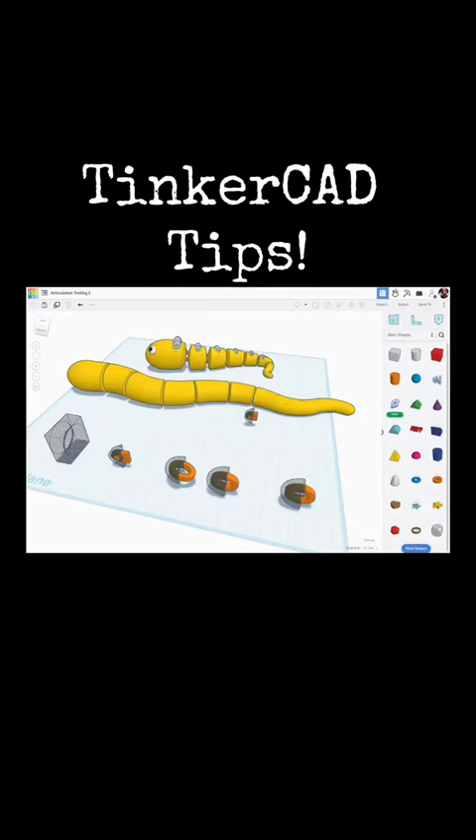TinkerCAD tips, object articulation. This is part 2.

In my prior tutorial, I had been working on this object here, and I showed you this object down here that I used to split this snake I made with wave duplication into separate elements and put a bit of a curve. You can see those cuts I've put into it here. I was using this particular design for a hinge and a pin to join the sections together.

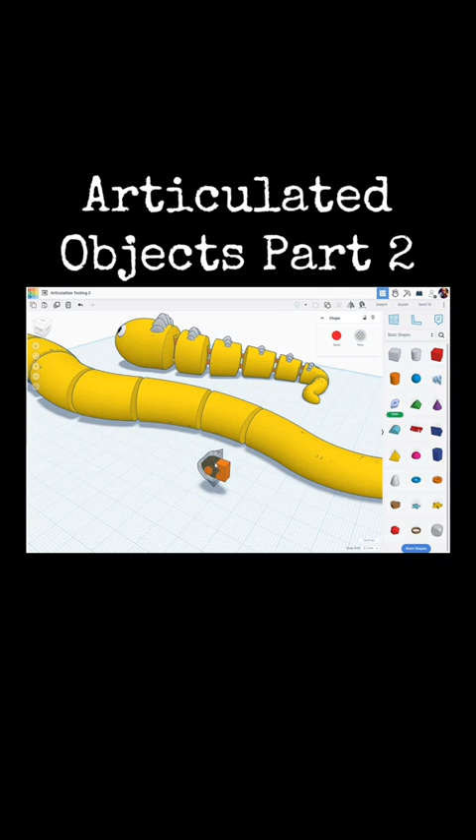Now this particular one I'm going to put into this gap right here. In so doing, I had scaled this down a little bit, and I noted that when you scale these down enough, you're going to want to make sure you select all of those elements and widen it up a little bit.

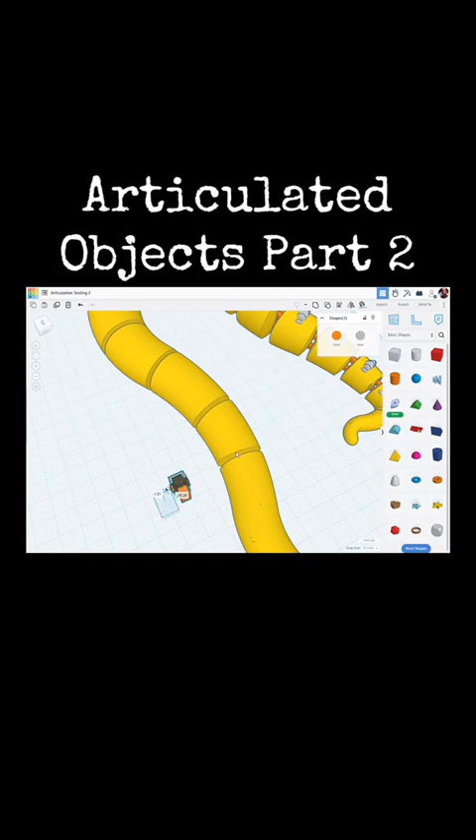So let's continue putting this one into this gap here. Let's look here, it's rotated back a little bit. All right, let's drag it over into this gap. Let's grab the rotation handle and move it about a little bit so it kind of lines up across that gap. We'll move it here.

Now note that I have my snap grids set here on point 1. Let's move it to off. That'll allow the most granular control of the movement here.

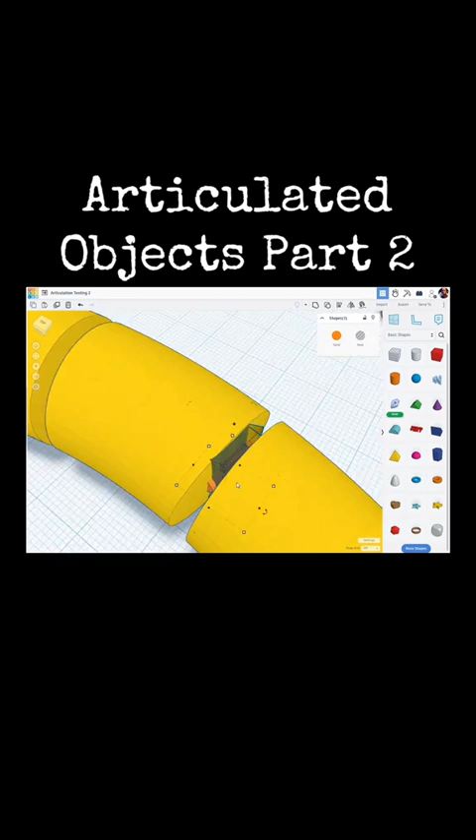And I want to move this such that the whole box is just protruding from the front part. And then this orange pin that you see here is all the way embedded into the back part. So we'll continue moving it here. About there. I can see a little bit on the other side. Let's move it. There we go.

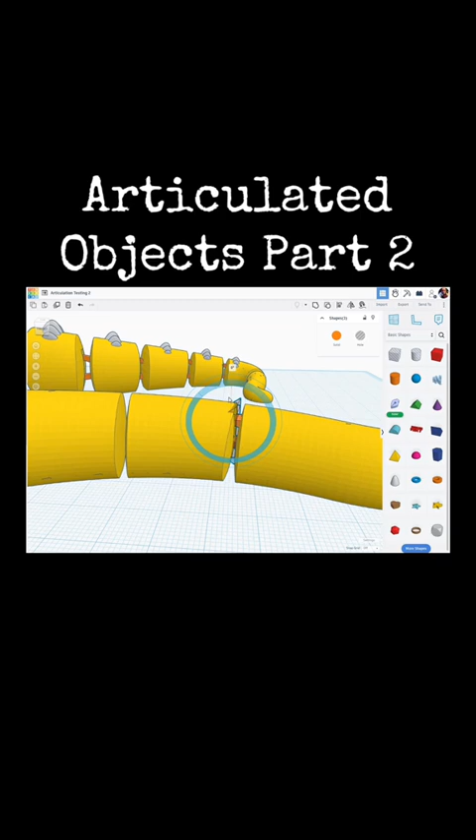Let's go ahead and move all of this down a wee bit. There we go. And when you're satisfied it's lined up where it needs to be...

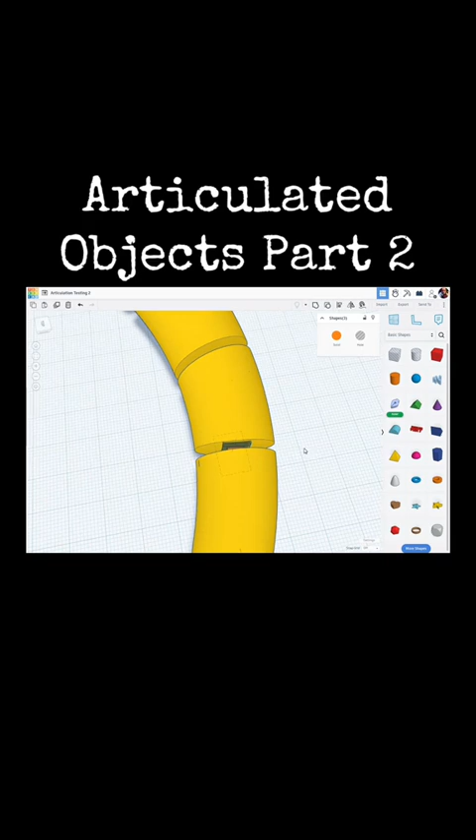What we want to do is grab just this whole box. Oh, looks like we need to move that in a bit more. We'll select all of that. Shift-D, select the snake part of it. Let's zoom in here so we can see everything we're working on. Let's move it ahead. There we go.

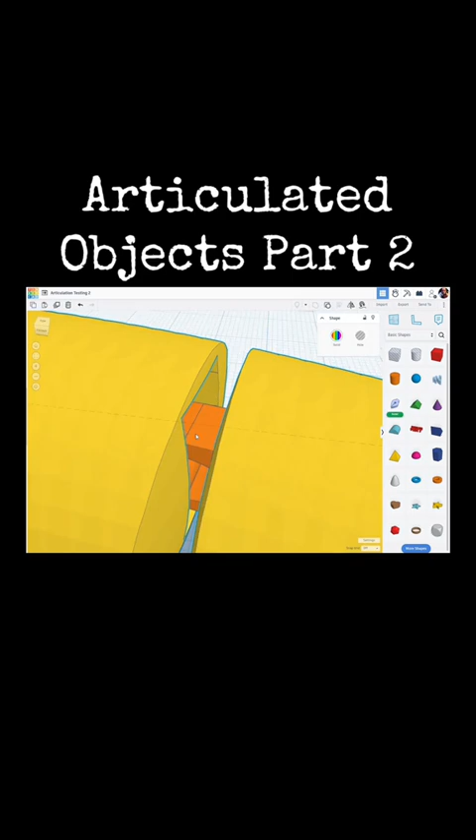Zoom out. We'll grab just that whole box part, shift-select the snake and hit Group. We'll give that a moment to resolve. Once it's resolved, it'll look like that. You can see that hole in that front part now.

We zoom out. If we hit the letter T, we'll make it transparent. You can see that, but the pin and the loop are still separate objects. We have yet to group those. Let's make that snake back to solid, non-transparent.

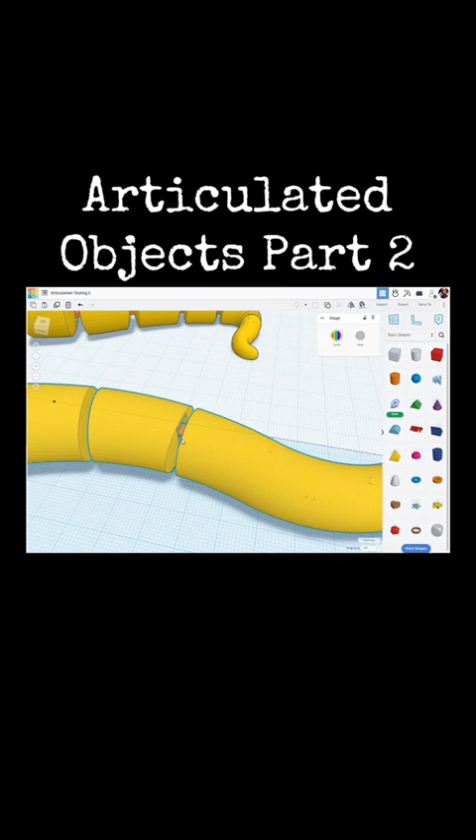I'm going to lasso select all 3 of those parts, verifying there's just the 3 here. Now I can click up here to group, or hit Control-G, and we'll wait for that to resolve. Once resolved, it'll look like that.

Let's back out, hit the letter T, make it transparent. It's kind of difficult to see with all the lines, but there we have the loop, and we have the pin, and we have the hole part of it.

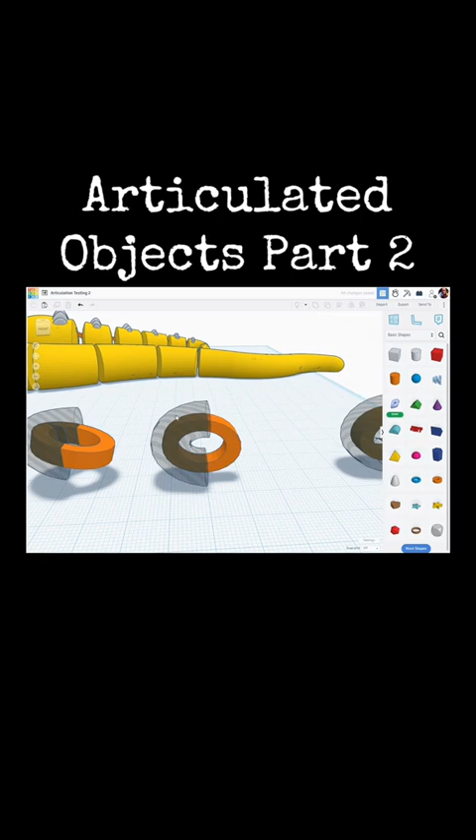So that's that particular design, and I had also been working on an additional design, and I'm going to test both of these on here. This one's made a little bit differently. This is done with these square shapes here, this particular type of object, and I did some resizing and stretching, so we have this loop, and then I made this type of hole object.

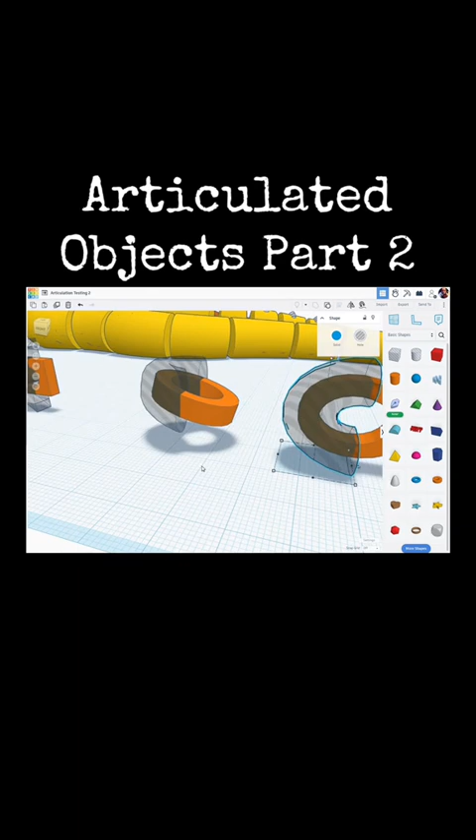It's just a tube, so this is a 2-part hinge. This hole part will be embedded in the front section, and then the loop will be embedded in the back. Now I have one that I've oriented in the vertical, up and down like this, and then I have another one that's done in the horizontal here, like this.

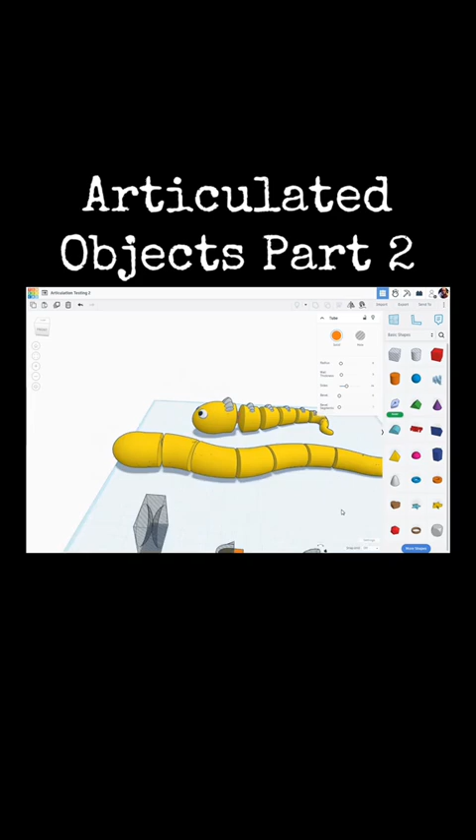I've angled it down a little bit to help with the printing so it's not completely flat and won't need as much support underneath, but both of these should work equally well. So we have a gap up here. Let's take this one and embed this vertical piece into that part of it.

We'll select the two, Control D to duplicate, and bring that over here. Let's move in a bit and make sure this is sized correctly.

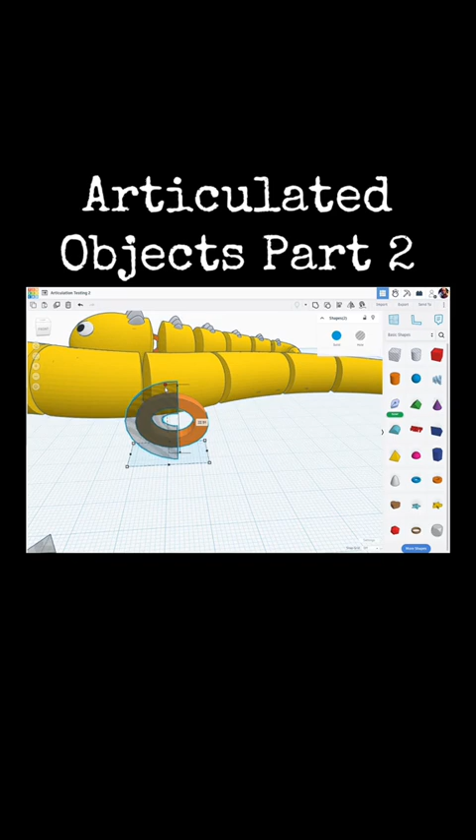I'm going to size it down a little bit, holding Alt and Shift so everything gets resized equally. Okay, that's about the right size.

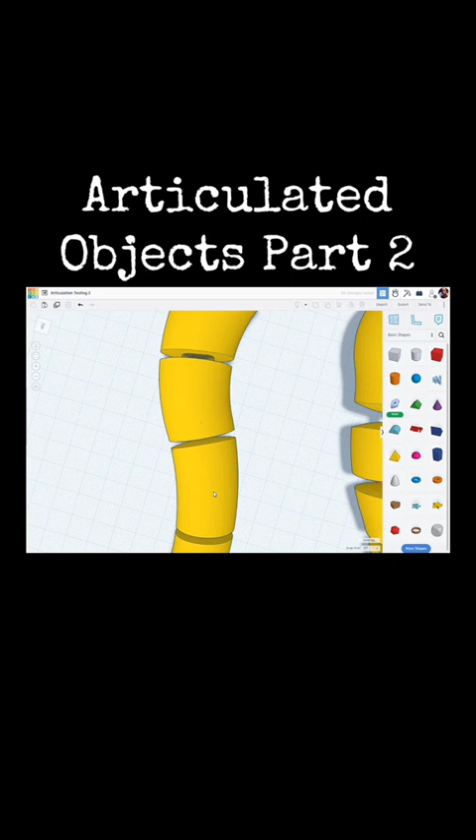While they're both still selected, we'll bring it over. Let's grab the rotation handle and rotate it a bit. To help our cause here, let's select the snake and make it transparent so we can see what we're doing with those inner parts.

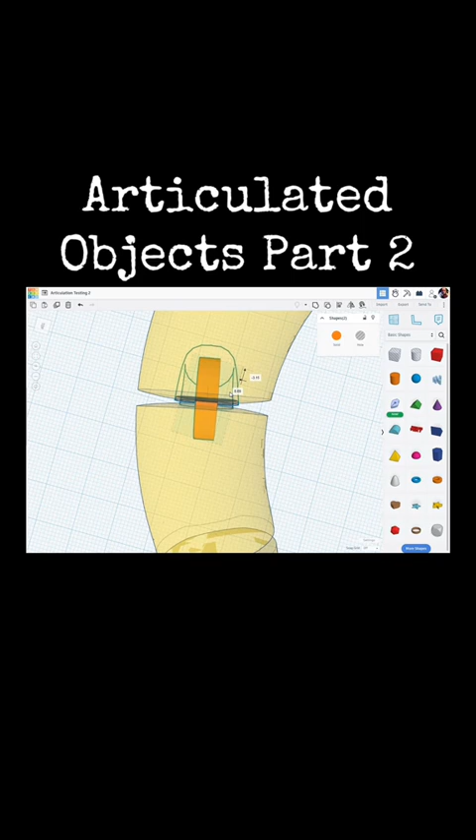We'll position it right above. The orientation looks good, but now we need to move it forward such that the hole part of it is protruding by the front half.

Let's select the snake and make it solid again. Moving in here visually, we can see that part needs to be moved forward a bit more.

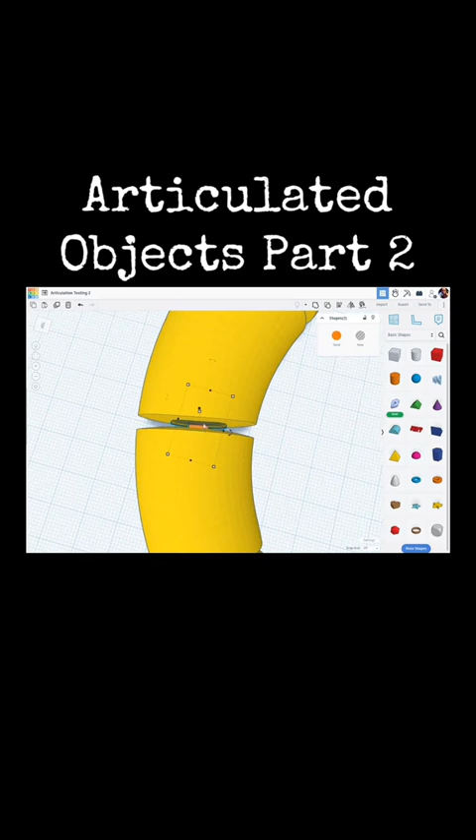So we'll select everything, deselect the snake part of it, zoom in, and just inch that ahead a little bit more. There we go. Let's check from the side.

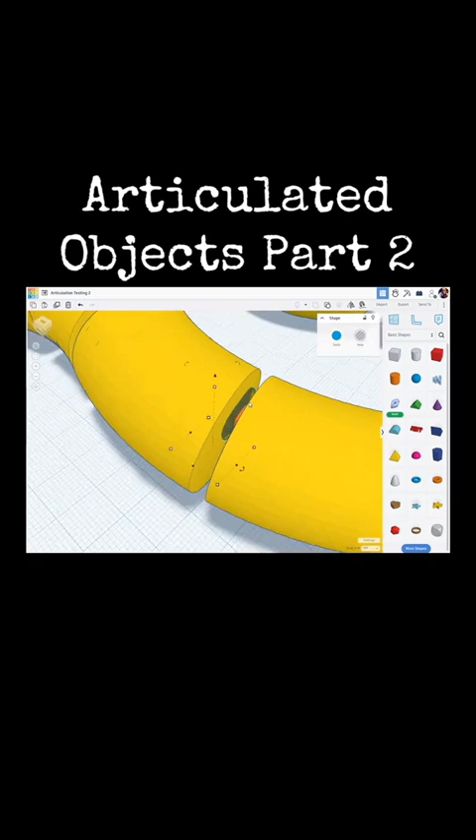All right, once we have it placed, let's zoom in. I'm going to select just that whole tube, shift select the snake part of it, verify I have just the two items, and group that together with Control G or this button up here.

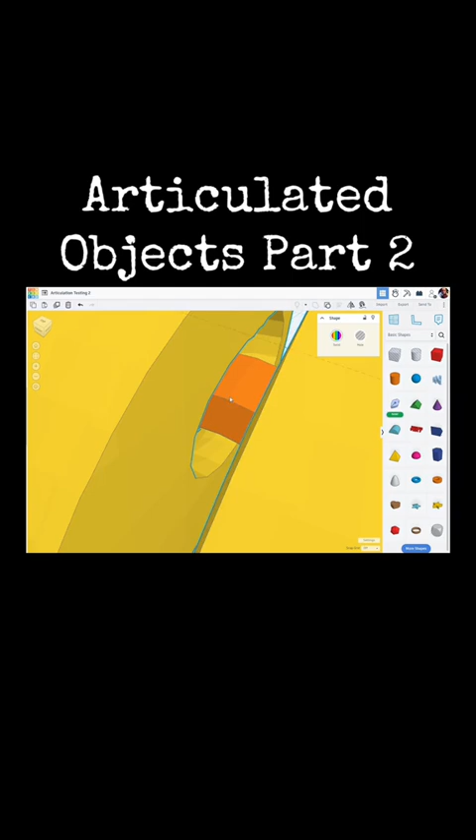We'll wait for that to resolve — we do a lot of waiting for TinkerCAD to resolve complex objects like these. Once it's resolved, it should look like that. If we zoom in here, we can see the hole that's been embedded or grouped into the front part.

Move underneath, we can see the same thing. Now that loop part of it is still a separate object, so we're going to lasso select the two of those, make sure I have just the two objects here, and we're going to group and allow that to resolve.

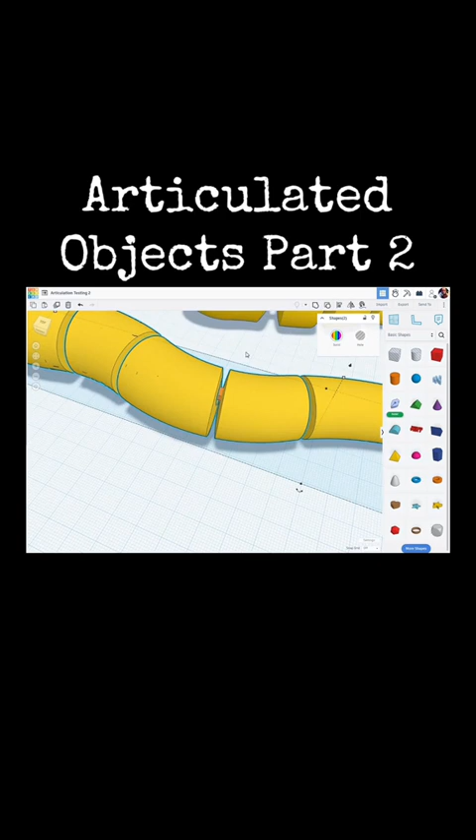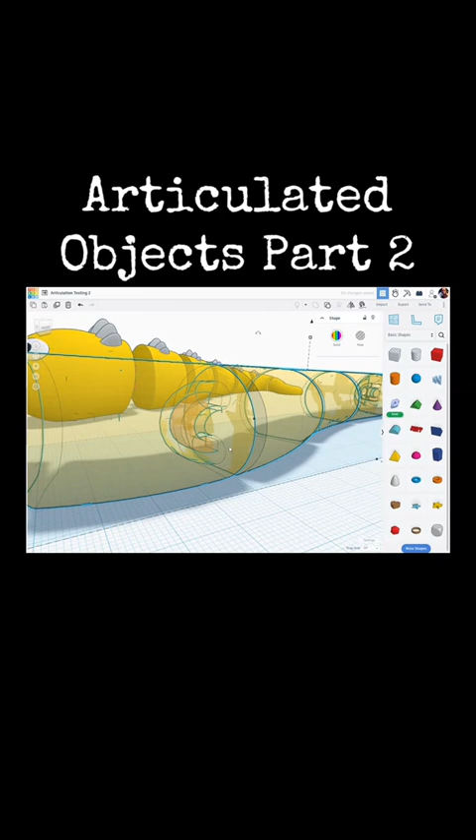Once it's been grouped, it should look like that. I have this as multicolor, so the snake object here is yellow, and the loop etc. is orange. But if we make it transparent and zoom in, we can kind of see the hole shape there, and then the loop shape.

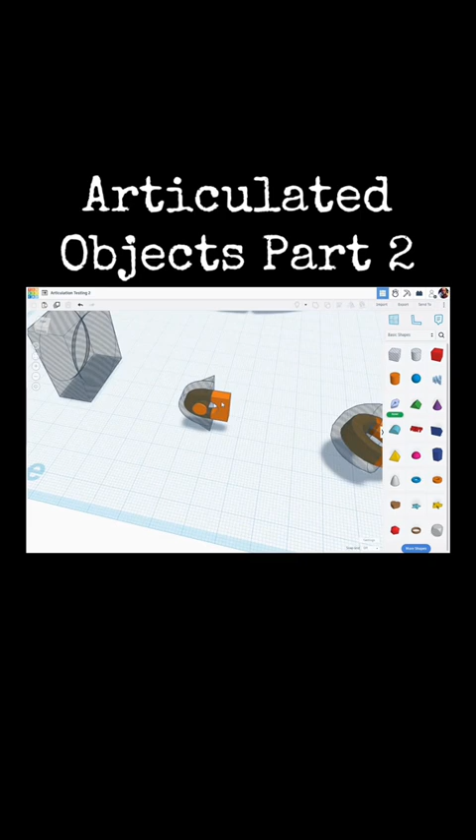So that's the end of this tutorial. In the next one, I'm going to show you quickly a printed version of this that I did, where I tested out my first design. Well, heck, let me just show you that in this tutorial. I'll quickly show you the one that I printed up and how well this design worked.